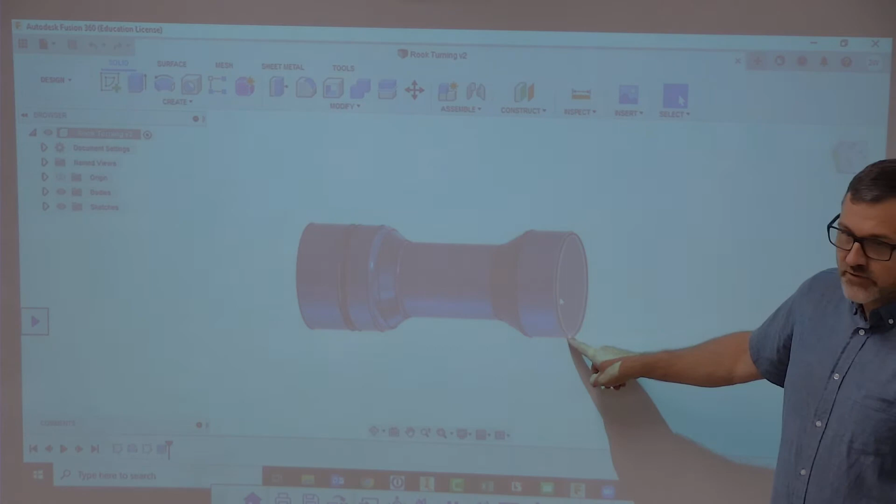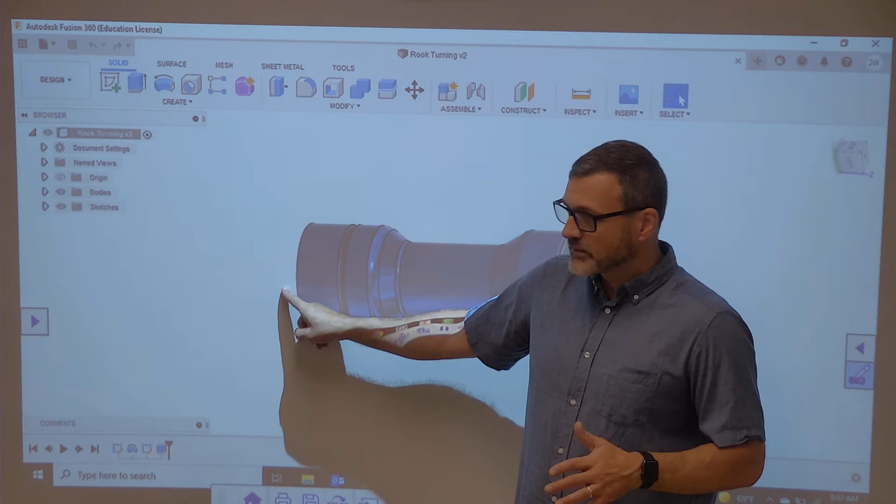There we go. So if you do it like this, you'll be facing off this part. This will be your nice face off part, right? And all you're gonna do is mill it to smithereens, because you're gonna put your grooves and everything in it. This is going to be the side that has the nipple on it, and so it's going to be the side that is a little more inconsistent on the bottom of it. You can leave it like that if you want to.

So I would flip my Z, yeah. So I would have it sitting like this. I think this is going to be a better part.

So we'll go straight to manufacture, go into our setup. I'm going to go to turning, grab my lathe.

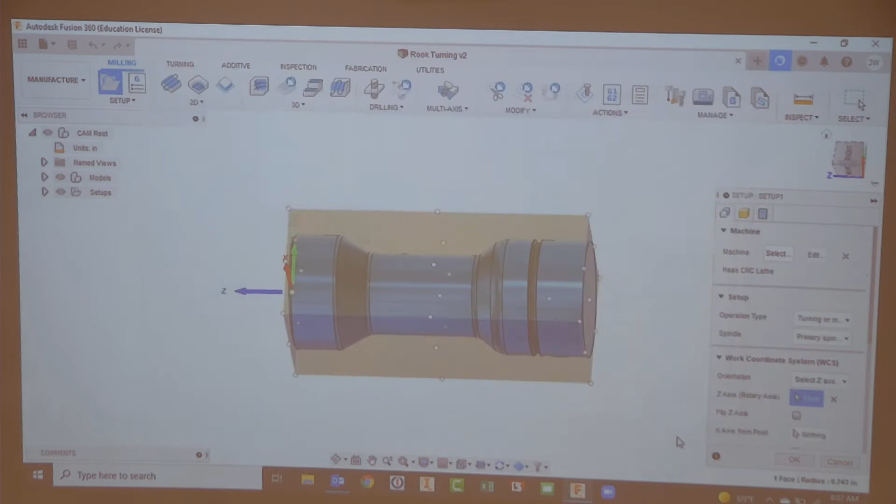Now, one of the things that you want to look for is you want to make sure that when you're doing this setup that you're putting everything in that right spot. So my Z flipped to the right spot. I need to be from the front. And if I want to have some offset in there, I can. But I got to remember that moves my 0 out, okay?

So I could have this here, and then still that makes the face of this Z0. So in your program, if you move that out, it's not really necessarily changing what you face off. It's really changing where 0 is.

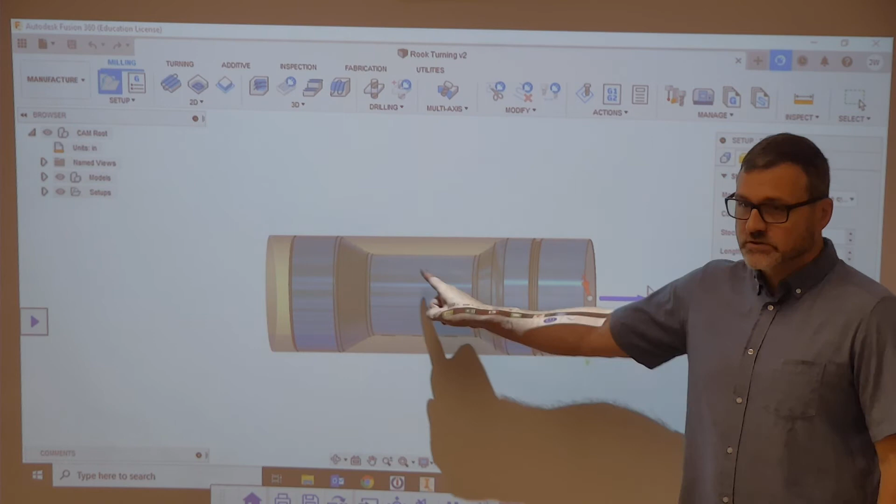So if you're looking at your part print, going, okay, so this is a half inch, this is 3/4 of an inch, this is 2 inches, this is 3 inches. Move this back 50 thousandths, this is -50, this is -550, this is -800, this is -3 inches 50. So you just have to keep remembering that.

And when you're creating programs for other people, when they're looking at the program going, hey, Desiree, how come the part's 3 inches, but it's going back 3 inches 50 thousandths? You're gonna always have to keep telling them the part's 50 thousandths back. So probably the questions will come up, why is it facing to Z of -50 rather than Z0?

So what you want to start to be thinking about now, so if I were to say, okay, everybody write your program, hand it to the person to your right, how are they going to run it without having a lot of problems? So maybe we'll do that today. Maybe we'll just say, everybody, you're not going to run your program, you're going to run somebody else's program. So everybody hand your program to the right. So that's what we'll do today, just so you can sort of feel that.

So I know you probably already tweaked your program the way you want, but remember the idea is, so if you're planning on being an engineer, like Clint, he does not ever run his programs at Honeywell. He always runs somebody else's program. So that means he always has to be anticipating what is it that they are thinking when they are doing something. How are they articulating that to me in a setup sheet or a set of work instructions?

Okay, so today we will do everybody give their program to the person on the right, and you will not run your program. So you're running to the person in front of you.

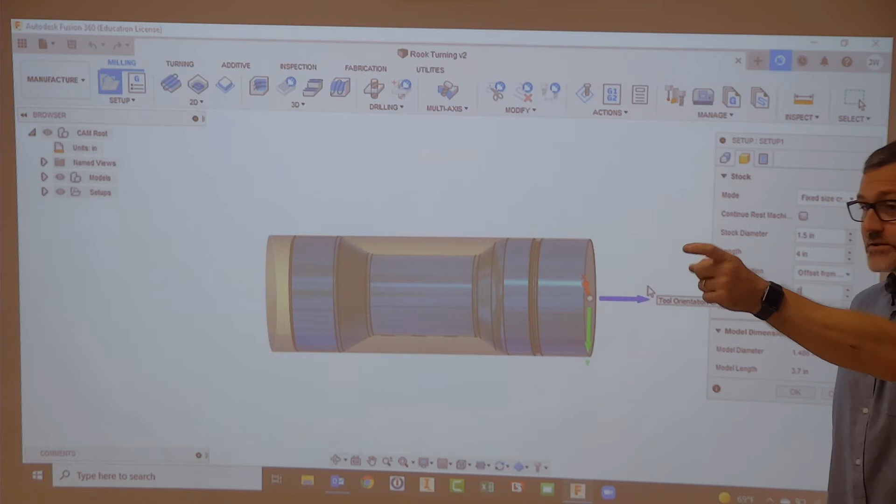Okay. So pressure's on today to make a good program, right? Or maybe it's not. Maybe you're just hoping the person to the right makes a good program and you don't care about what your program's like. But like for me, I want the least amount of questions asked, so I want you to make me a program that works really well.

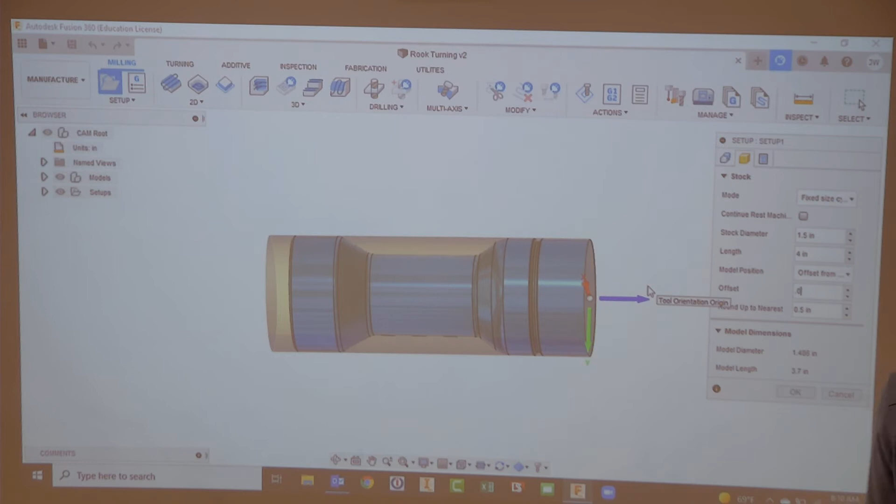Alright, so that'll be fun. Alright, so I'm gonna make my length just a smidge longer, just cause, not really, anything about that, won't really matter.

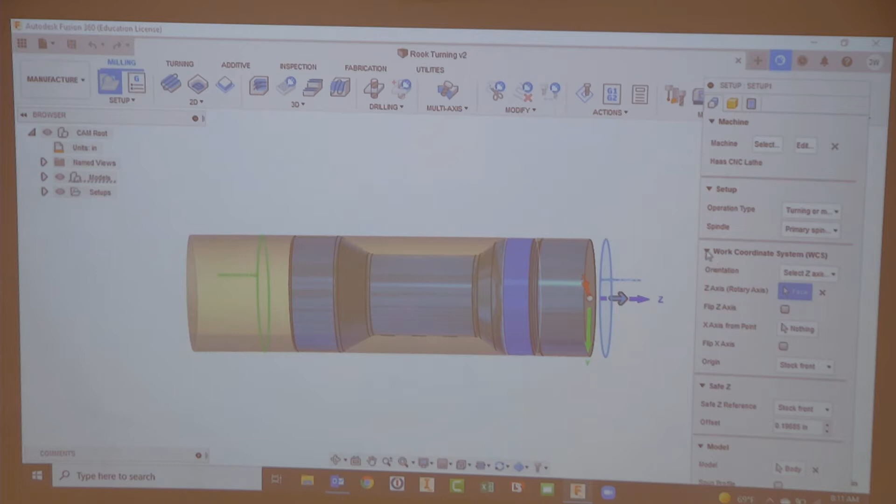So you want a smooth face off bottom? I would want a smooth faced off bottom for my part, so it's set. Like the ones you already have, think about the way that you part stuff off and how it doesn't look as good. So why would you want that smooth face off bottom if you're gonna cut it off? It's the bottom of the part. That bottom is the bottom of the part.

Yeah, but we've been facing off the front though. Right, because that's how it worked best for those parts. So here you have an opportunity to make a really nice bottom on your parts without having to do another operation. On the other ones, you could come back in, face off the bottoms on a manual lathe or another operation, just get it nice and smooth. You could just leave them, you know, just please don't take them to the belt sander.

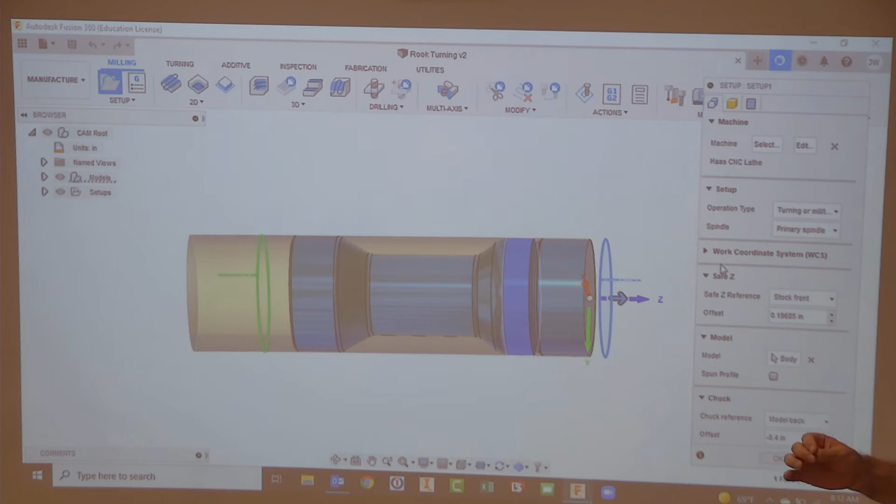Because I don't know of any of you guys who have ever made a nice part by belt sanding. Belt sanding is like, this looks terrible, I'm gonna take it to the belt sander, the magic wheel over there, and then it looks worse. I'm still turning it in, and I'm like, what if you just faced that off right there? Nope, go into the belt sander.

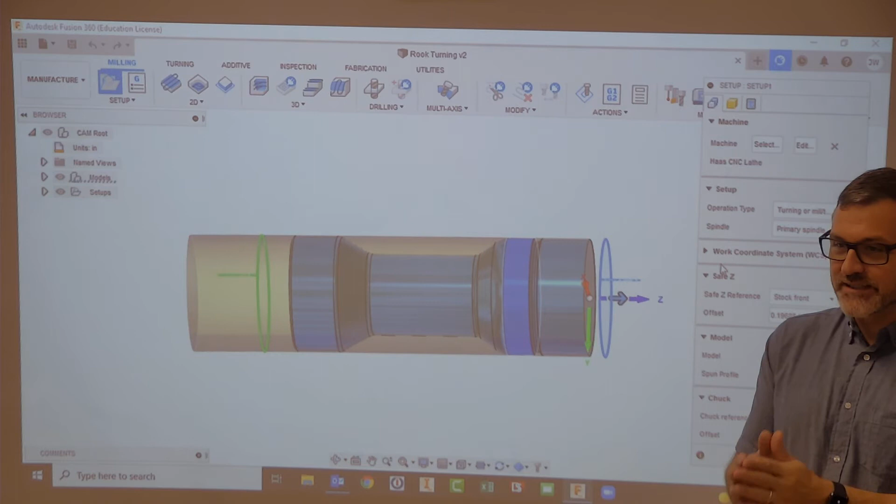Or you're like, hey, I forgot to put a chamfer on there. I'm pretty sure that I can hold it and spin it, and no one's ever done that, right? Every time I've seen it, Ray Charles could see, blind people everywhere could tell that you belt sanded that on there. They're like, that is the unevenest thing I've ever seen.

So anytime we have the opportunity to do the backside this way, I would want my backside faced off, or my bottom side faced off, because this is going to end up getting that section counterbored down the top of it. That's how I would do it.

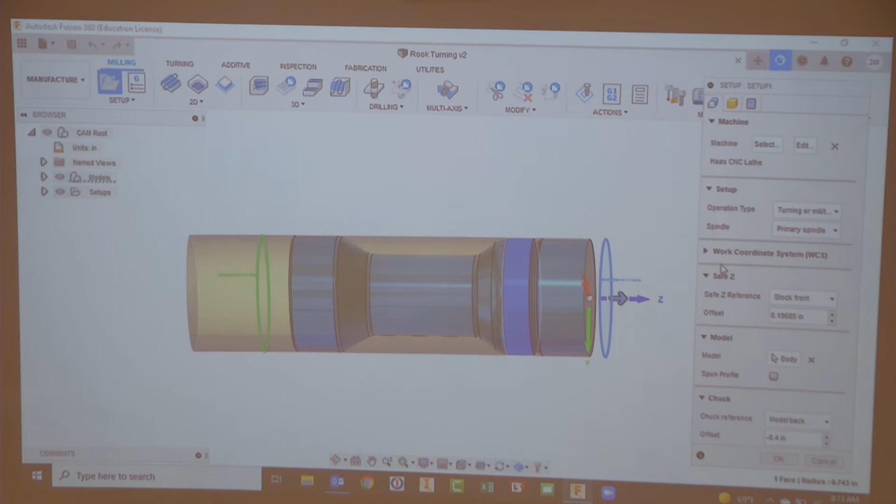Can you do it the second time? Yeah, good. I love this idea. I'm so glad that I just randomly had the idea of everybody send your part to the right. That was, I'm like a genius, man.

All right, 1.5 inch stock, fixed size cylinder. And then I've got, it's gonna be program 400, offset 1, so that's gonna be just 54. Everybody good up to there?

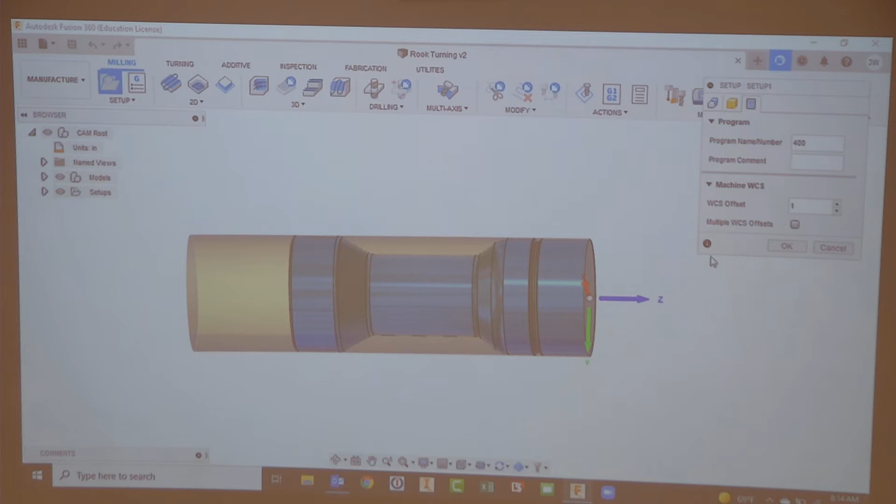Okay, so I'm gonna go ahead and save mine. Seems like a good time to save. So the first thing I wanna do is just come in, face this thing off, select my tool.

I'm gonna go to my VNMT 431 that I've been using, and so if I leave it as is, I've got a surface finish of 600. We've been doing about 1,000 on surface finish or surface speed.

I want to max my spindle at 1,200 just so I don't get that really quick high RPM, and Desiree saw that the other day when she parted something off, and you guys might have heard bing, bing, bing, bing, bing, going in there. So make sure that when you want to watch for that max spindle speed.

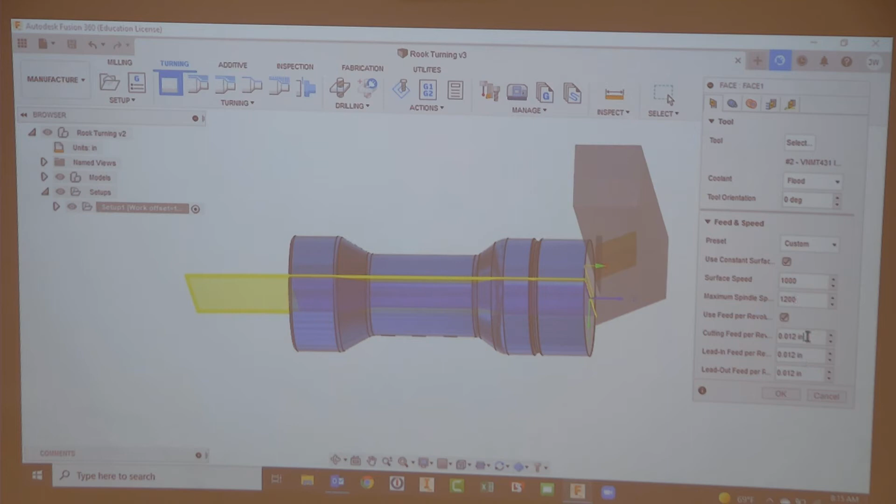I probably will go ahead and, since this is really my face cut, I'll put it down to 6 thousandths on there. I'll leave the lead in and lead out, okay, they don't bother me. Model front, I'm happy there.

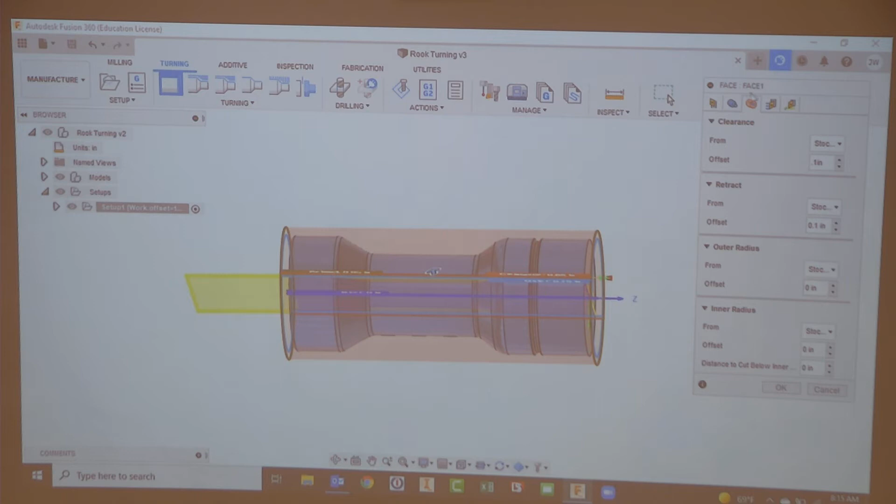I'll go ahead and bring this down to stock OD, and I will maybe go 100 thousandths. Stock OD, I'll go 100 thousandths. And probably can leave the rest of that alone. Move my tolerance up to 1 thousandths. Compensations in the computer. Fourth tab.

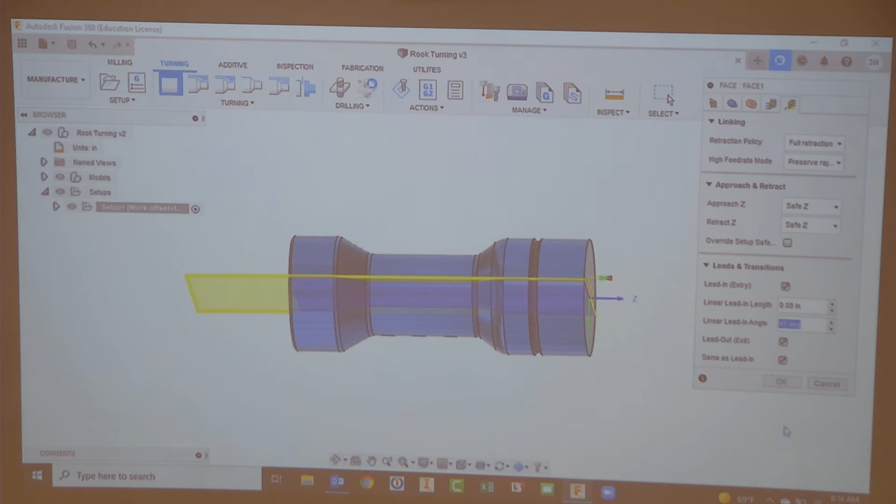I think everything is okay. Full retract. I like the way that it's coming in. I really don't necessarily care if this is coming in or out at a 45, especially for this, it's not going to matter.

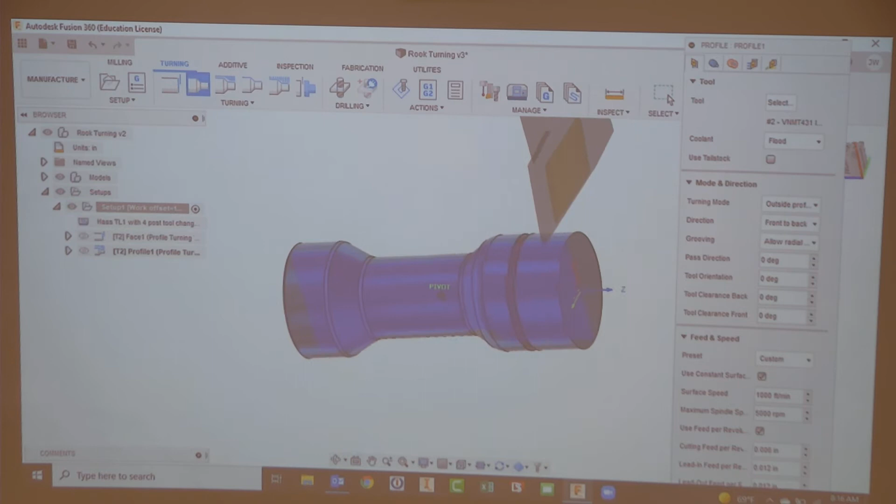Okay, so I've got a nice face off. Now I need to do some turning, same tool. So when it shows it like that, do you need to flip your X in your setup? What do you mean? How it shows my X being up? How it shows your cutter being from the top. Well, I mean, I can just, if I want it from the bottom. Okay, so ultimately, I guess really that's what it's going to look like. But, you know what I mean, if you're standing in front of the machine, because it's going in like that. But so I just want it, I don't really care if it's coming from the top or the bottom, I just want to see it come into it, yeah.

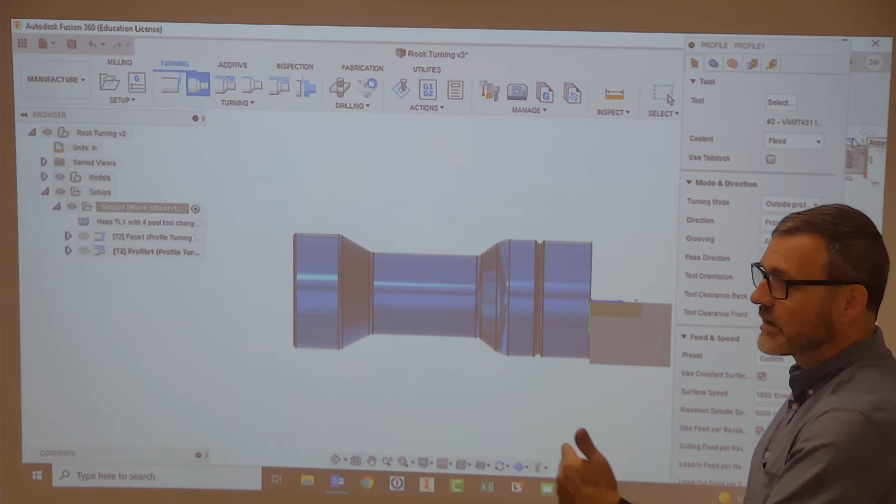The way it highlights the part, like how yours turns all blue, mine doesn't do the whole thing. It does not face the entire thing? Because they didn't read out the sections in the top, the low cut sections. Yeah, on these, it is way better to create a turning model and then add the other things into it, because you've already got the notches in the rough, and so it's stopping there. So it's seeing those sections and going, we got something different happening here. So I would delete those things out. I would just do, I think in the video, all I did was make the turning section of it. It's gonna be way simpler to go in and delete those, go back to your design and just delete those out, or stop now, do a save as, turning only, delete out those chunks out of it.

Chance, today, what should you go buy? What should I go, an alarm clock? Twenty minutes late.

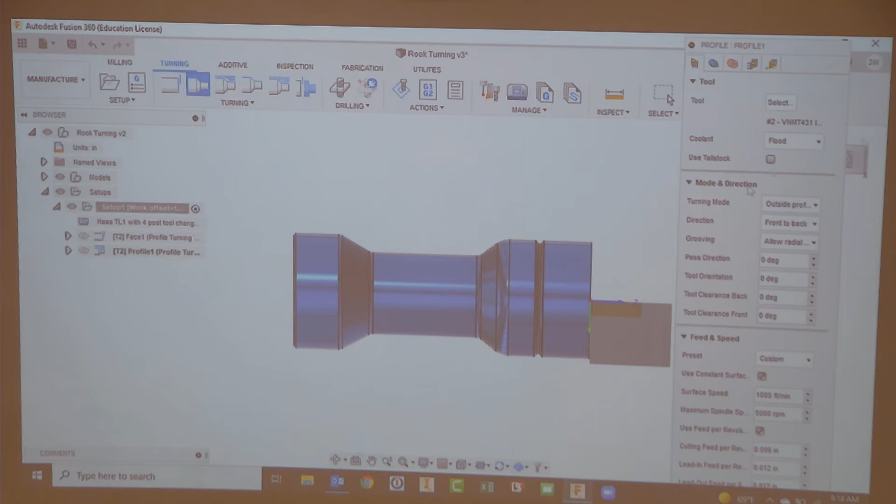Do you need us to wait for you to get yours?

Anything beyond that point, so all those, all you're focused on right now is everything that just gets turned, no milling features in there at all. You can definitely turn the entire thing, having the entire thing drawn, but as of right now, it will be easier if you have just a turning model, and we'll add the other stuff in as it goes.

Now, if I was doing this on a live tool machine that had a 5-axis lathe or something, I would have the part flipped, and I would grab all the milling from the other side, and then I'd part it off, the bottoms of the part.

I put some small radiuses along my V groove and some other areas just for deburring purposes. I just wanna have some nice edges on there, so 20 thousandths at the bottom, 10 thousandths at the top. Those are not really on the print, those were just parts that I had added in.

How you looking, Cal? I was still showing the same thing. Did you delete all that stuff out? Okay.

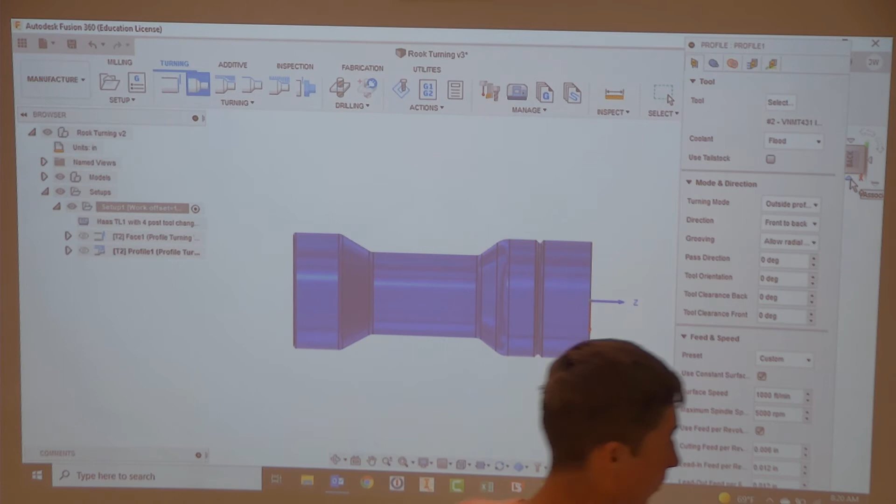Bring it over here and we'll take a look at it. It's going to be better if you work off of what the video that I did, and that's gonna keep you from having this, where everybody has to stop and wait.

Why is Z so far back?

You deleted all the milling off of it? They're still milling.

Alright, let's go. Okay.

It's the axis on it. Dang it. Wish it wouldn't have done it like that. You're doing it all over. Yeah, so...

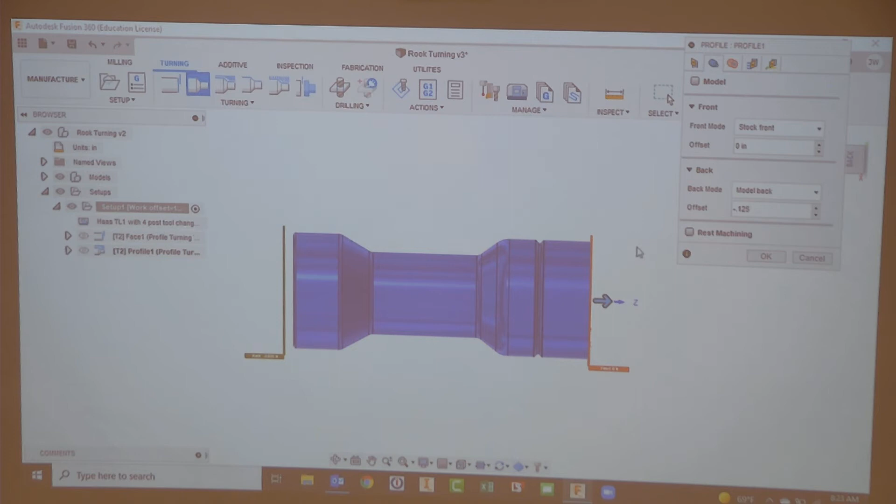Over here, so if I want to go back further, I can, but it does cause me a little bit of problems if I do that, because you start to get that undercut that just goes back further. So normally I would turn back an additional 1/8 of an inch. I'll show you when we get to that point, we'll look at that and see why that causes us a problem.

So which one are you doing right now? Are you finishing? I am roughing.

Here's what I don't love about this: when you go back that additional 1/8 of an inch, it really wants to dive down into the part because you've told it to allow radial grooving. So anytime it can go beyond the part and clear some areas out, it's going to try to do that. And that is fine, it's not going to hurt us here.

For my finishing, I don't think it's liking the lead out. Okay, so what's it saying? Lead out has been modified due to a gouge with the remaining stock. Okay, so it's just a yellow triangle, right?

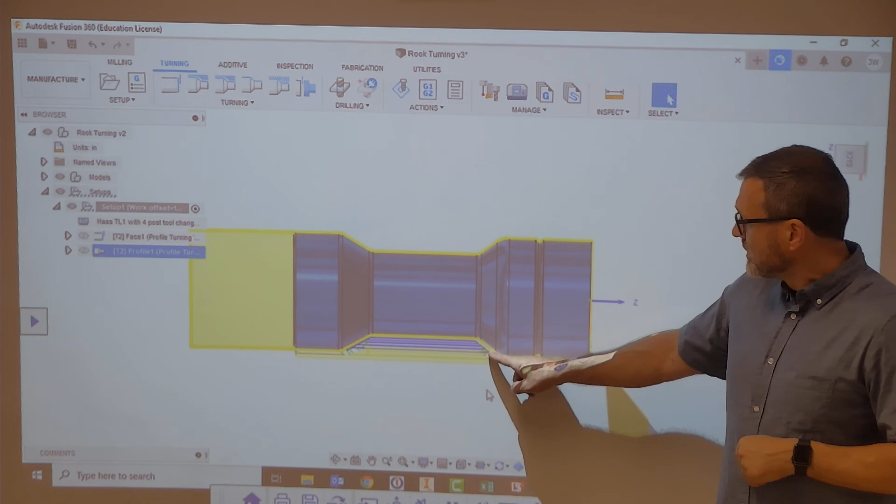So it's saying, you did not have it right, I'm going to adjust it for you so you don't run into your part. Because if you say I don't want it to do that, probably back here, or here, probably more like here, it's going to gouge into your part as it's doing this operation.

So those are beneficial things. If you want to have those things off, if you're a person who does not want a yellow triangle on there, you need to go in and change it. You can change your lead out to probably 90 degrees or 0 degrees, which...

Yeah, you turn your lead in or lead out off. I think we turned your lead in and lead out off the other day. And so then, when it has lead in and lead out turned off, it's just always going to go this way - perpendicular to the part.

Then you're never going to have to worry about it. Lead in and lead out is beneficial because it follows the contour more. So if you have a really complex setup or a part that doesn't leave you a lot of extra room, it will make sense to have it on there.

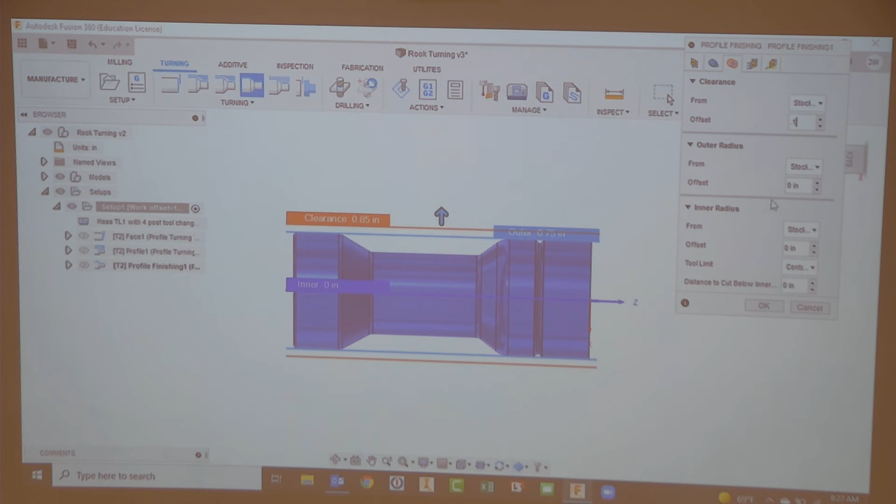All right, finish pass is same tool. Change my feed rate down to, let's go 6 on there. I want my spindle max at 1200. No, actually that could be 0.

Everything else I'm probably pretty happy with. Okay, got my finish pass there, and so I've got this same yellow triangle, and I am happy that it modified that for me.

But if I don't want that, then I can just go in and turn those off, and so now I no longer have them.

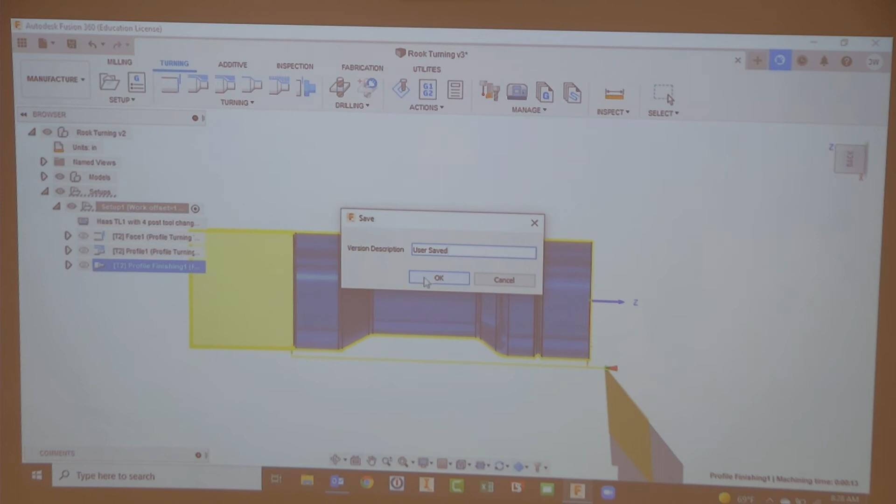Do you turn yours off, or do you modify yours? So if you have a triangle warning light, if that bothers you, it's an issue, because it's kind of like a service engine light. You either need to fix it or put a piece of electrical tape over it. The light bulb will not burn out as much as you hope.

You can unplug it, you can definitely do that. You can smash the LED, take a paint marker and go over it. But you got to do something with it, or you got to be like me, I just get used to it. I just assume that's how I know the car's on, because the service light's on.

For the finishing, are you gonna do a grooving cycle for that? For this? Yeah, we already did it. It's in the profile, and since it fits within the 90 degrees, which will fit within our tool profile, it's going to just grab it as it does the finish pass. It's going to grab that groove and take it along as it goes, which is really helpful, because then we have no stops, which helps keep it from burrs.

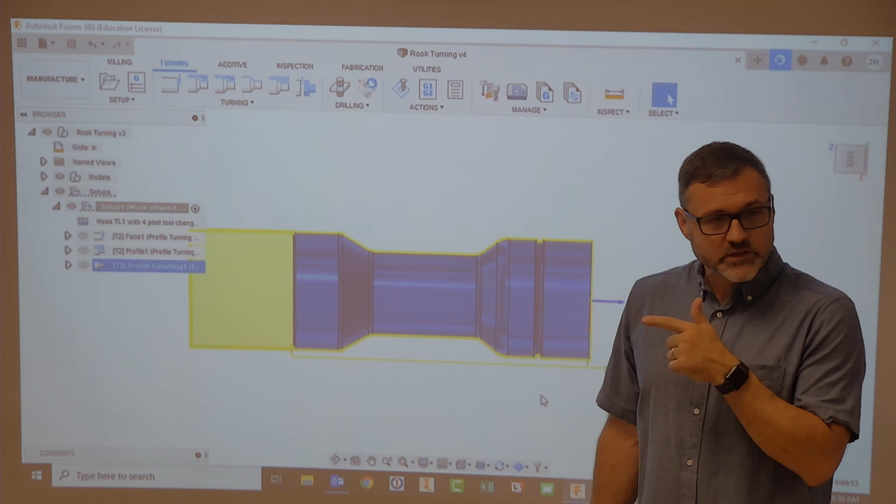Were you going to ask a question? Yeah, how come you didn't put a radius more to the left of that part, down here? Because when I drew it in the YouTube video, we took that out. We changed that. Oh, okay, I didn't see that. So not only is that part changed, but the angle has changed.

So what is the... I don't know off the top of my head. So I can change the angle, it's gonna help with some of our tools as we go. Should probably go back and change it then. Yeah, I would. Okay.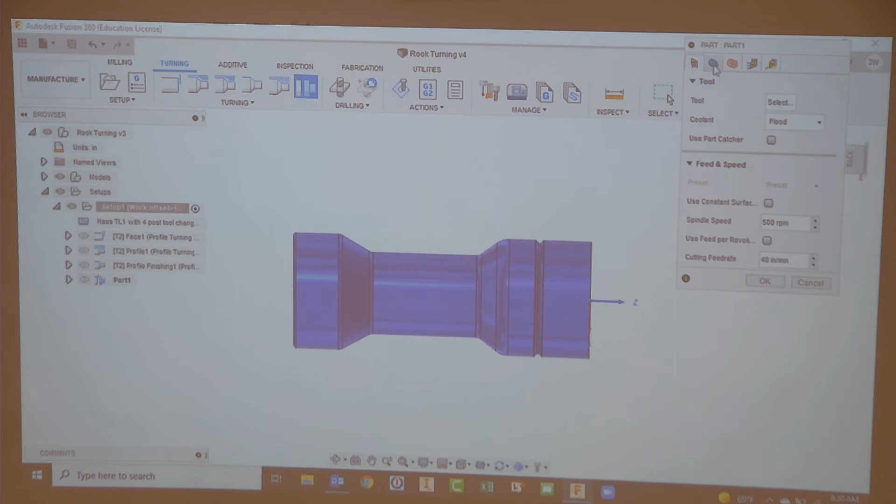And so then part off, come in, change tools, and go to my grooving parting tool. I want to make sure I've got the right one on there, and that is 125 wide. Enter, I'm going to make that tool 4. I want to make sure my spindle does not go up super high. Go ahead and change these things. If I want to leave extra stock there, I can, but I don't.

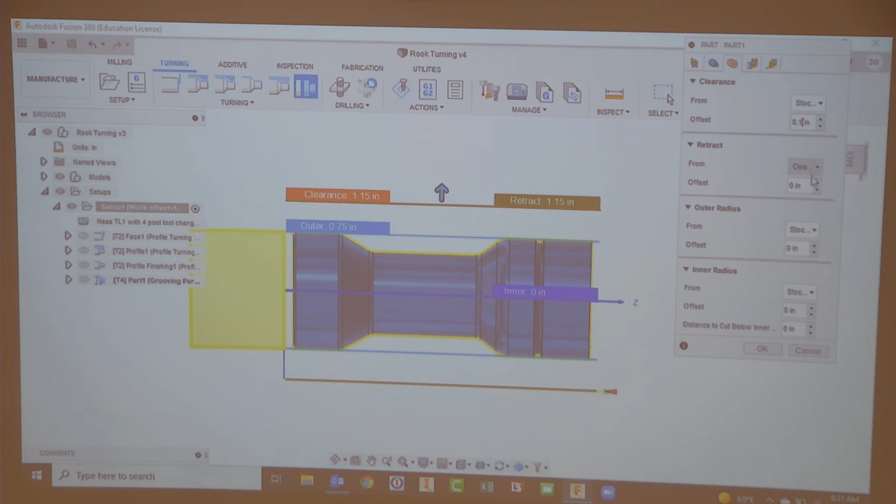Are we doing edge break too? I think I probably would, even with the radius in the front, even with the 10 thousandths radius. I usually will put something in there, if anything, it just helps keep any kind of burr from there. But you do have this radius on the back side, so essentially you shouldn't have anything there. If I was going to do an edge break back there, I'd probably do a fillet, I think we were 10, I'd probably just do 10 back there, just to make sure that one goes on nice and clean.

Okay, I want to make sure I do pecking, and I want my peck depth at maybe 50 thousandths, my retract is 10. I want to use a reduced speed and feed. This right here is radial, so at 200 thousandths it's going to reduce down to 1.

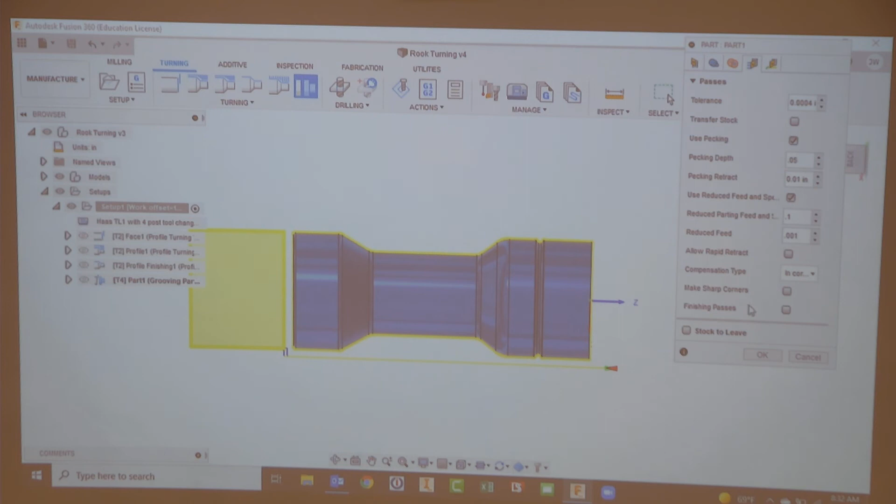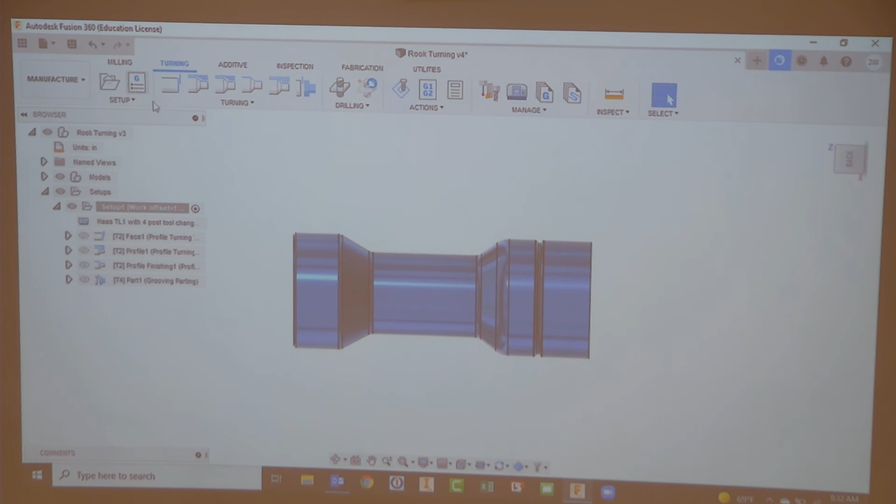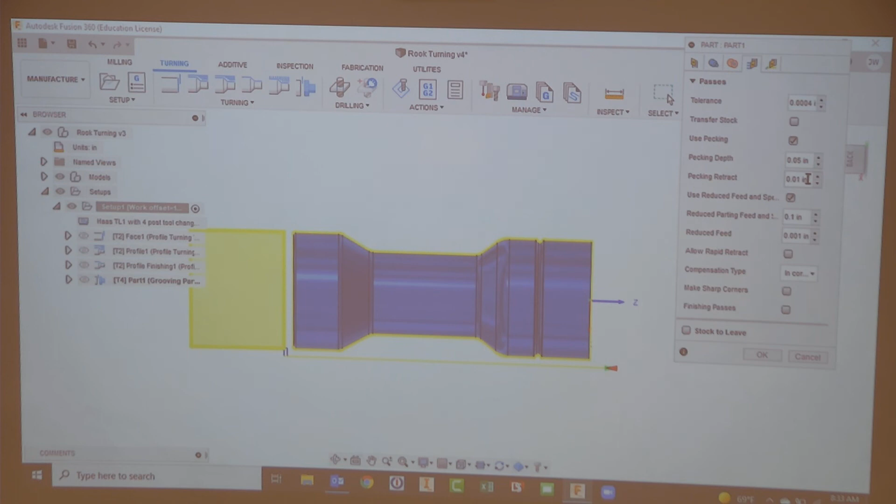I need to back up, I did something wrong. On my max spindle speed, or on my surface speed, I want to be 300, not higher than that. That will be a slow part off, but it will be a better part. And what'd you put for reduced speed and everything? Is it 1? At 200 thousandths diameter it'll start to slow everything down. I could probably go down to about 150. If I go any smaller than that, it's going to wobble when it changes, so I don't really want to go down much further than that.

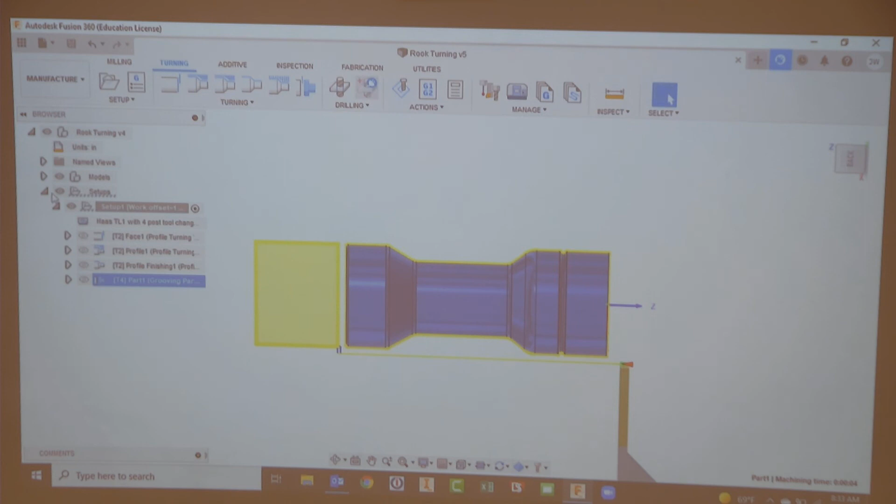Make sure I got save. Okay, can you simulate yours? Yeah, let's go from the top and simulation.

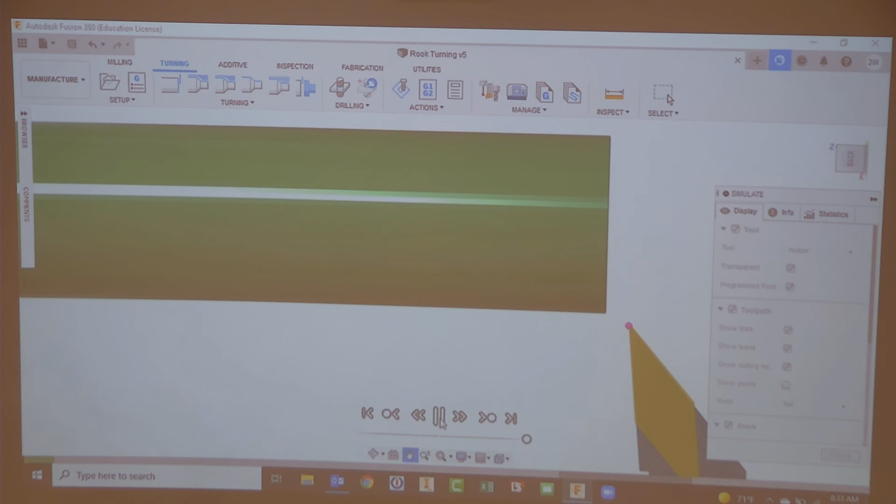Mine has a little bit. Are you leaving stock? Did you leave 10 thousandths on the OD? If you didn't leave 10 thousandths on the OD, it may not see or know what stock you have there.

I have stock to leave on. You have stock to leave on? No, I don't. So what it's doing is, between rough pass and finish pass, it's just going back over what you did. So you want to make sure, I left 10 thousandths stock on radial. Okay, leave 10 thousandths on the roughing. Yes, on the roughing.

So my stock to leave says X and Z. Doesn't say, so it's just X. I guess I already had it.

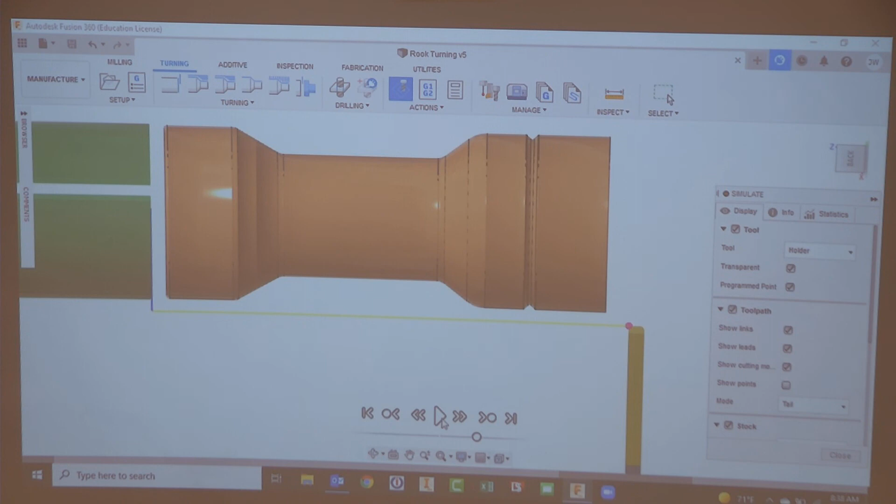Okay, next two parts that you're going to do, that you won't have videos for, I will put drawings out today for the king and the queen. You're running somebody else's part. So that means tomorrow when you come in, we're going to work on the king and the queen. I will give you drawings for them, and you'll be running someone else's program, okay? So think about that as you're writing the programs. Both the king and the queen, for the turning sections, you'll be running somebody else's program, okay? All right, let's go to it.